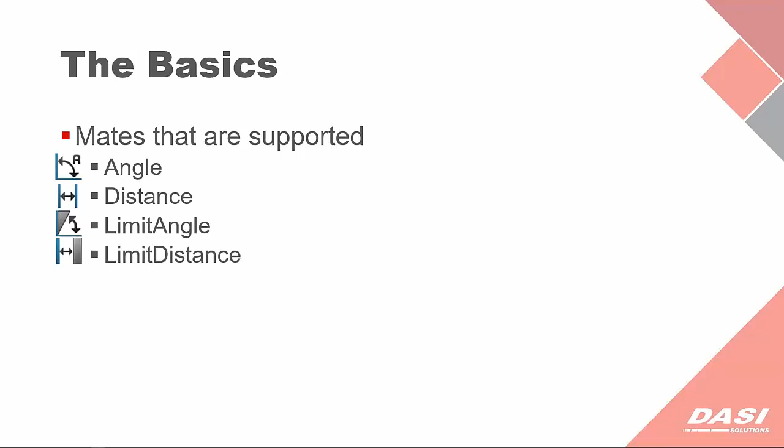So let's take a look at the basics. The basics are what mates are supported. Well, the angle mate, the distance mate, the limit angle mate, and the limit distance mate, of course, are controllable. A path mate, and path mates can be set up to be free-floating, but to use them with the Mate Controller, you have to use either the distance along a path option or the percent along the path option.

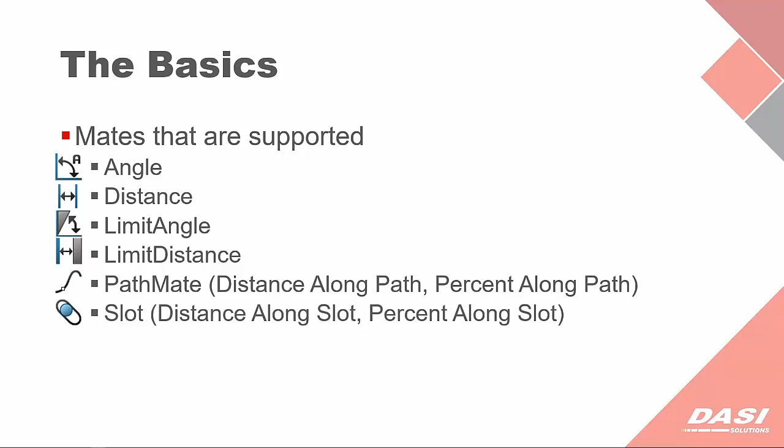Same thing with the slot mate. You have to use either the distance or the percent along the slot. And then the width mate is the last mate that can be used with the Mate Controller. And you can control either the dimension or percent on the width option.

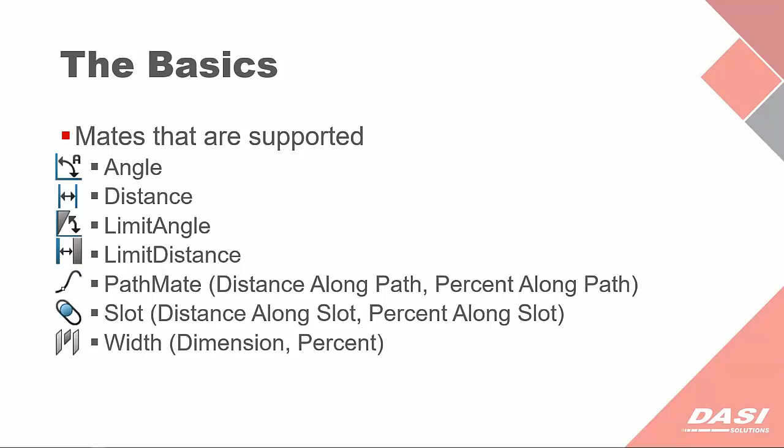So let's take a look at a simple example just to start out with. We got this plunger hook, and the way this operates is as the plunger raises and lowers along the cylinder, the clamp arms open and close. And what we want to do is create a mate that we can control with the Mate Controller.

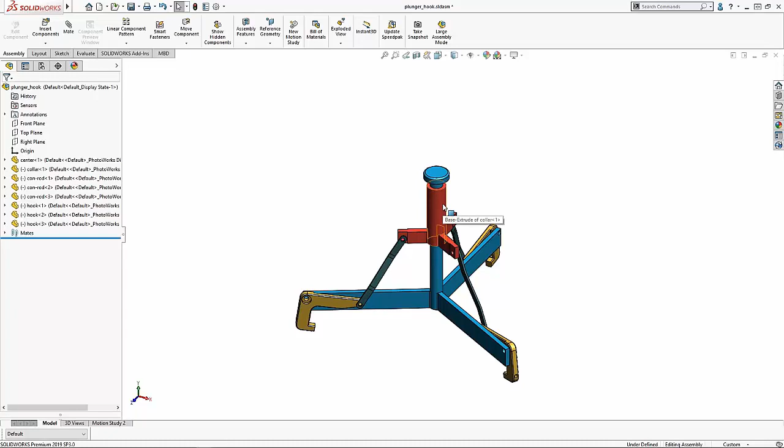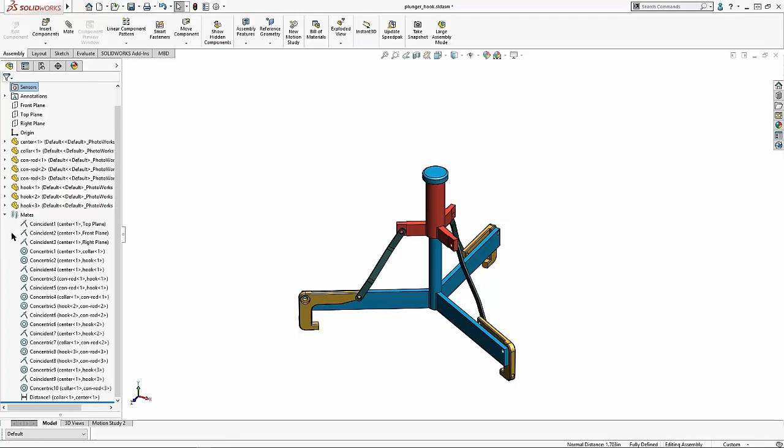So I'm going to set up and grab the top surface of the plunger and the bottom surface of the pin, and we'll create a distance mate there. I'm going to set the initial mate to 0. We'll right mouse click and use a mouse gesture to go back to our trimetric view. And notice over here in the mate tree, we've got a variety of mates for the assembly.

The Mate Controller is located under the Insert menu, Mate Controller. Mate Controller brings up a dialog box that prompts you for a couple of different things. First, we need to put the mates that we want to control. You can do that by going to the feature tree and selecting the mate that you want to control.

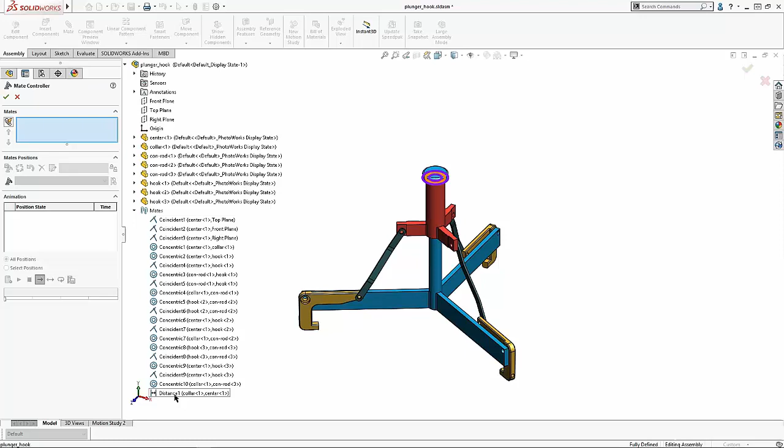Now notice if I try to select other mates here, it's not adding those. Those mates aren't valid for the Mate Controller. In this case, the only one valid is the distance mate. When I click on that, it adds it to the tree.

Let me go back and launch that mate controller again. I can collect all valid mates from an assembly by using this tool here, collect all supported mates. When I collect that, it's going to go ahead and grab that mate that's from the tree.

So now I want to go ahead and set up some positions for moving this model around. The way this works is you set up a series of positions basically. So the first position is with the distance set to 0. I'm going to create a new position, so I'm going to click Add Position. It brings up a dialog box that allows me to name the position. I can name it whatever I want at this point. I'm going to go ahead and use position 2.

In position 2, I want the red component to be located all the way down to the bottom of the assembly. So I'm going to set that distance to be 5 inches. I have to update that position by clicking the Update Position button. And now I've got that down to the bottom. And then let's do one more position before going back up to the top. We'll click position 3. In position 3, I want it back up to the top again.

So now I've got those all done. I'm going to go ahead and click Calculate Animation. And you'll see that SOLIDWORKS then goes through and runs that position. Well, it didn't go back up. What did I do? I didn't update the position. So let's go back to position 3. I want it to be 0. We'll click Update. Now let's run our animation. There we go. So that's how you set those up real quick and easy on a basic.

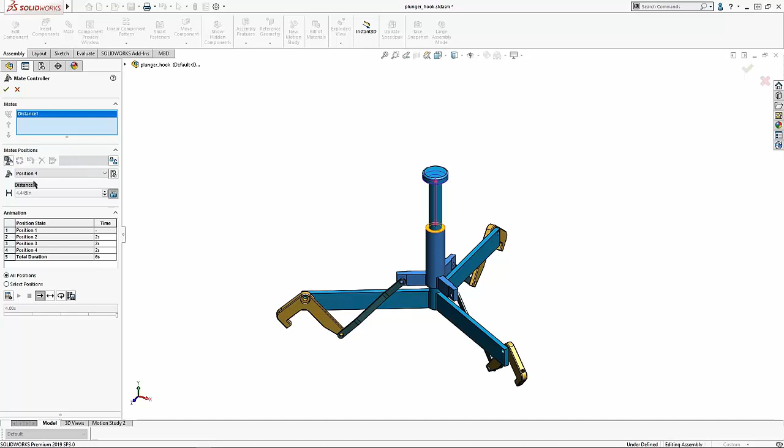When I click on that, I now can go over here and drag this to the position I want it to be located in, and in dragging that in the screen, it's automatically updating the distance over here. Notice the asterisk symbol. That's called a dirty mark. That means that this step has not been updated yet. When I click Update Position, that icon goes away. So now I've got position 4, which is an updated position backed up just a little bit.

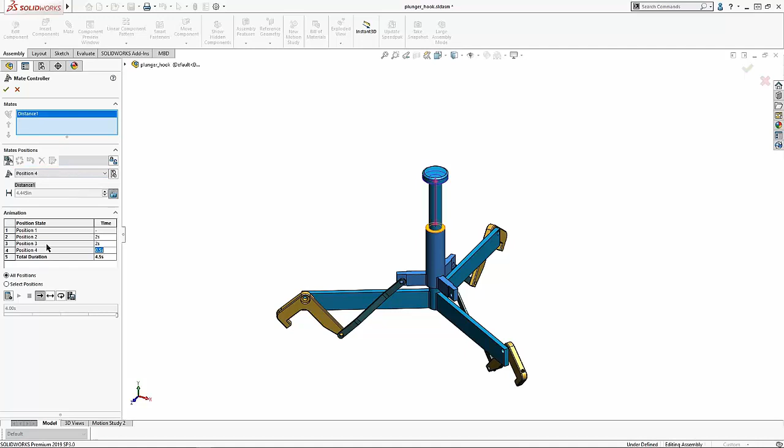I want it to go back down to the bottom position just as a jog. You know what, let's set this position to be 1/2 second. And so let's add one more position, which is going to be the bottom position. Well, position 3 is our bottom position, right? So we'll go back to position 3. Oh, position 3 is the top. Position 2 is the bottom. So I'm going to put it in position 2, and I'm going to create a new position. It's going to be based off of position 2, and we'll click OK.

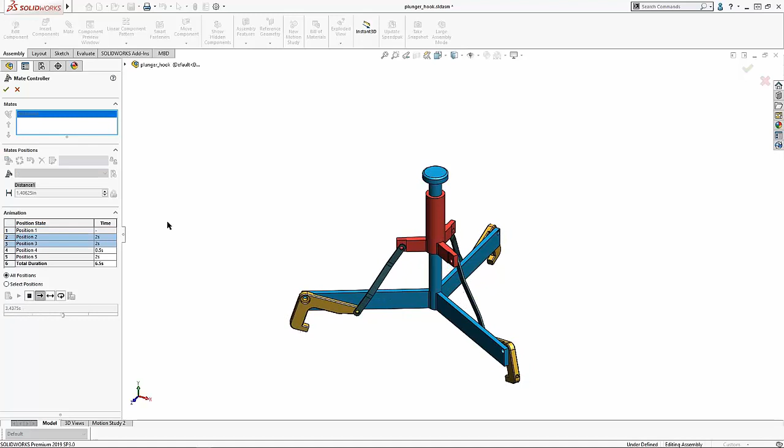So let's run this animation, and let's see what we've got. So we're coming down to the bottom. It's going back up to the top. Oh, it's jumping down to the 1/2 position. Well, that's not quite what I want to do. I basically want it to do 4 and 5 before I get to position 3.

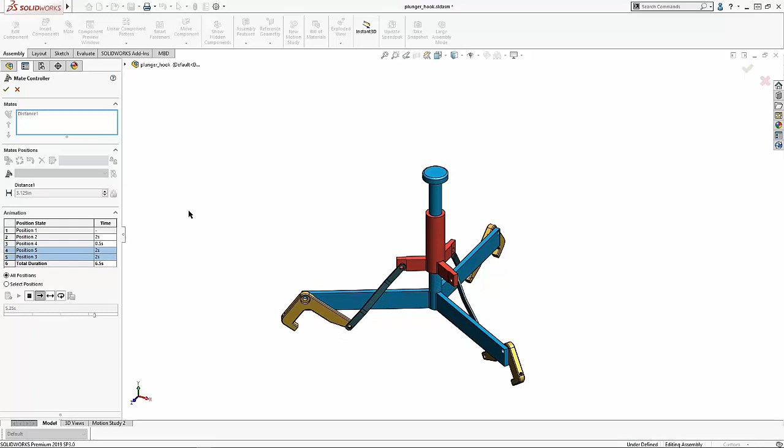So let's go back up here and go to position 1. But I want 4 and 5 to be above 3. So let's move 3 down to the bottom. Click OK. And now let's run our animation again. It's coming down to the bottom, jogs up, does a little bit of release, and then back up to the top. So that's how you edit your positions.

Again, you can rename those if you wanted to. Once I've got that done, I can save this out as an AVI as well. So down here at the bottom is to save this out as an AVI.

There's also a slider at the bottom that allows me to move this through the positions, so I can move it through the positions manually after I've got them calculated.

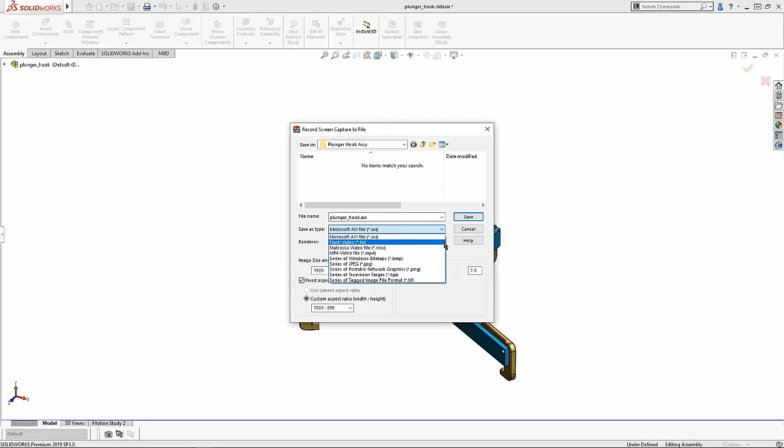To save that AVI out, you click on Save. You have the option to save it as an AVI, or you can save it as an MP4. You've got a variety of options to go through there. I'm going to save that for another animation, but that's how you get to it.

Once you've got your Mate controller set up, you go ahead and click OK. That adds it to the feature tree at the bottom, and you're ready to use that for your models down the road. I'll show some other capabilities of that on the next model.

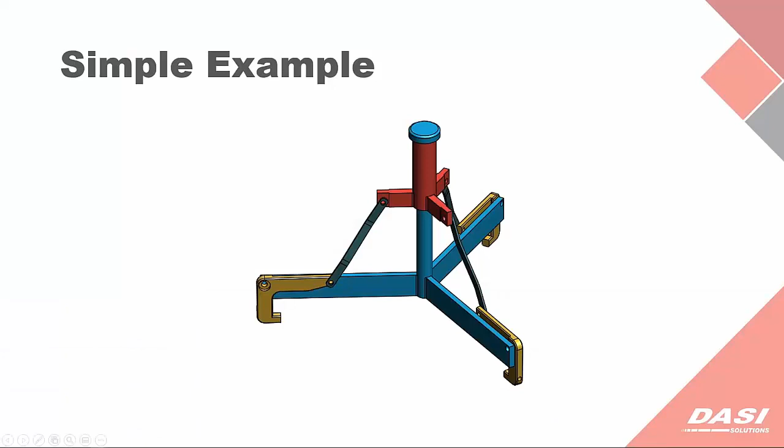Okay, so that's our simple example. So how about a puzzle? Let's take a look at a puzzle. I created this puzzle box just to demonstrate a couple of things I thought would be interesting. I've already got a Mate controller set up in this one. I'm going to bring it up real quick and run through an animation.

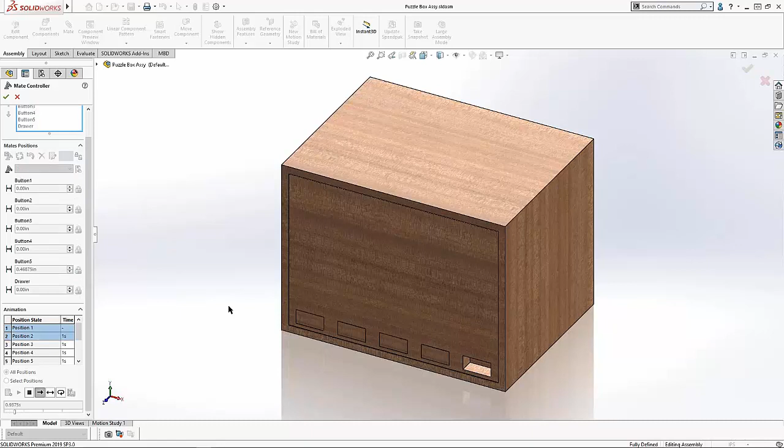So you want to make this puzzle box. I want to be able to open this puzzle box by pressing a series of these buttons at the bottom. The way I've got this set up is you press the last button in, then the next button in, then this one, then the middle one, then the last one, and you can slide the box open.

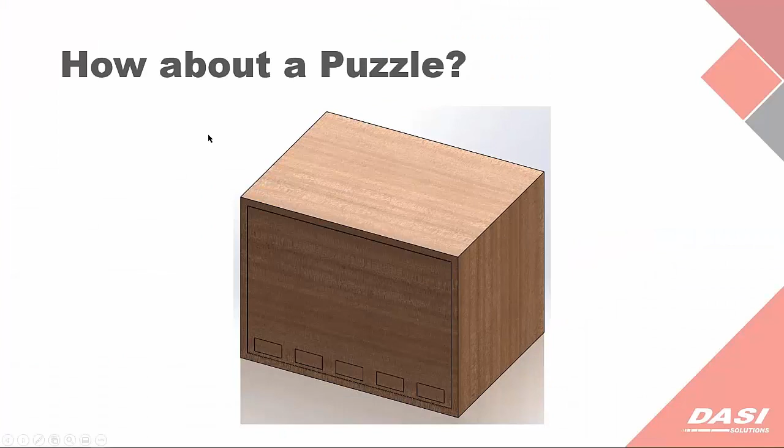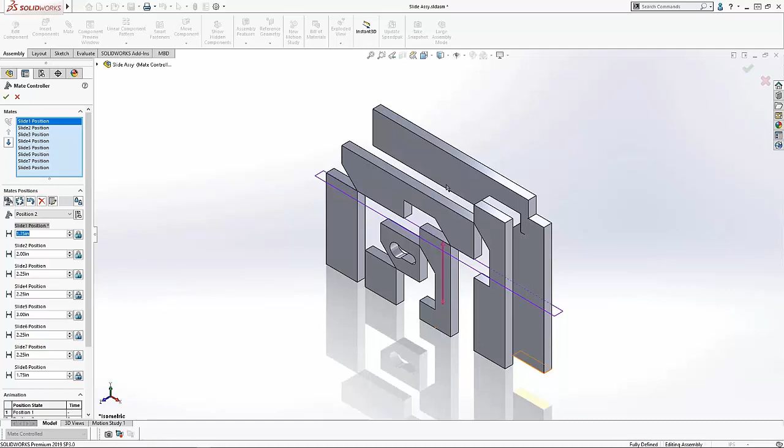Position 2 is going to be the next position. I'll go ahead and create position 2. In position 2, I want this slider over here, and you can see when I click on the dialog box, it highlights the elements that I've got here. I want this to be raised up half an inch, so I'll say minus 0.5, and that slider goes up. When I do that, I'd expect this slider to slide to the left, which is the next slider up here, and that one's going to increase by half an inch, so I'll do plus 0.5. I'll go ahead and save that position.

All right, let's do the next position, position 3. I want this slider to be able to push up into that opening, so I'll do minus 0.5 for that position as well, then update that position, and keep going through the steps.

We'll do another position, position 4. In that position, I want this slider to go up and push this one over, so minus 0.5 for that position, and this position is also going to be minus 0.5. We'll update that position.

Position 5 is going to have the next slider push that button - it's going to slide that one up. So I'll go up half an inch on that one, and update that position.

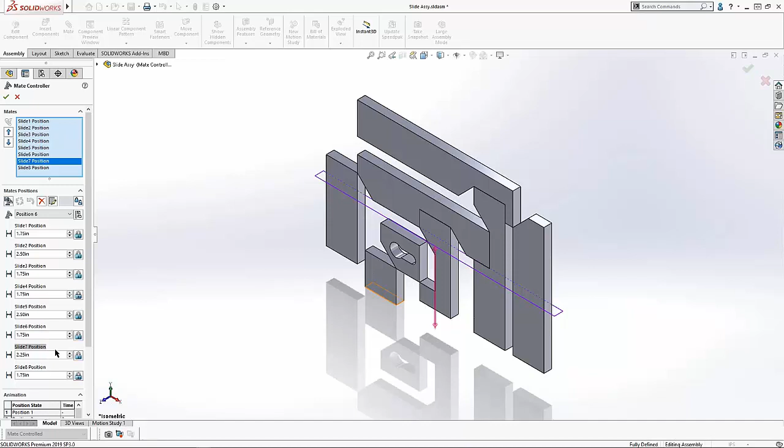Next, position 6 is to push this button up, so half an inch up on that one, and half an inch in on this one.

We'll update that position. Let's see what that looks like now. So we'll go ahead and generate the animation. There we got that slider going up, that slider sliding in, that opens up the next slider, and then this next slider goes up. Perfect.

So the last position is when I reset all the buttons. I've got it set up to where when this slider slides back over, all the sliders should reset. I'm going to go back to position 1, which is my start position. I'm going to add a position for that one, which is position 7.

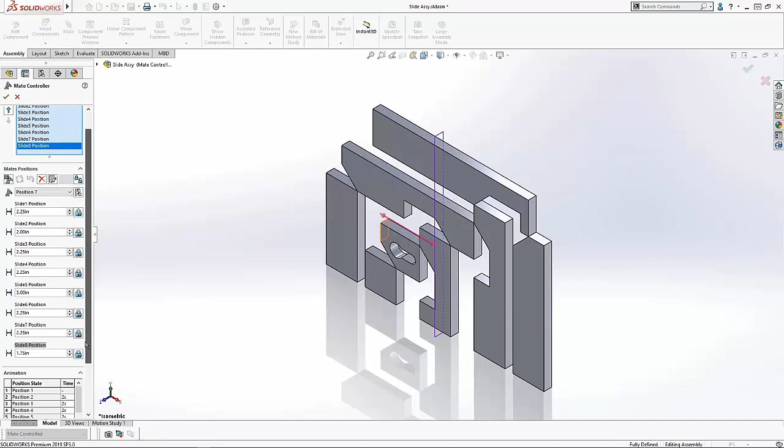Now when I run through the animation, it's going to push each slider up into position. Of course, the last slider's got this unlock feature that's going to release the drawer to be able to slide open. And then by pushing on that top slider, it's going to reset everything back to lock position.

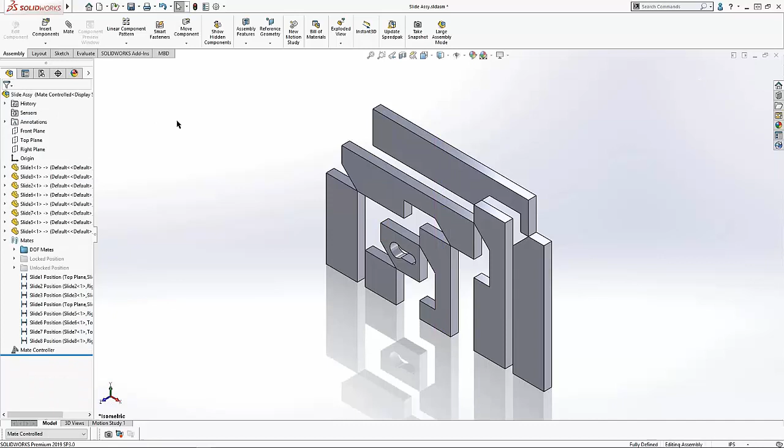Pretty cool. So that's the mate controller. That's setting that up for that puzzle box. I hope that was helpful for everybody. So we'll close that one out.

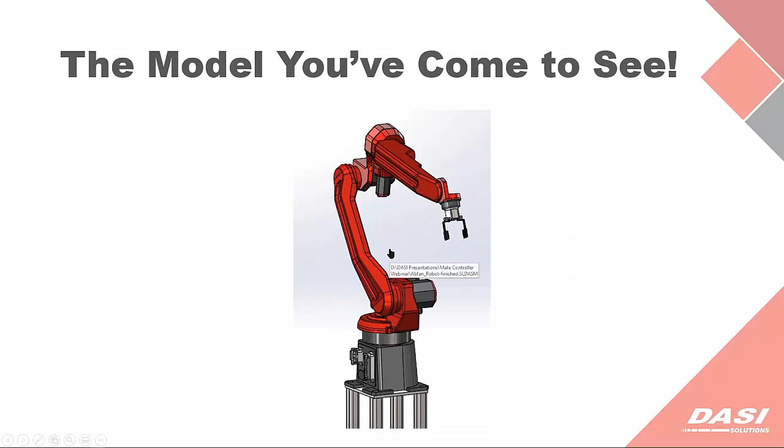And then the model you've all come to see is the robotic arm. So let's take a look at the robotic arm model and what mate controllers do for us in this model.

So the mate controller - you've got a model like this that's got a lot of degrees of freedom. If I move this model around, you can see we've got motion around the axis on the base, we've got motion on the arm up here. When you've got a model like this with a lot of degrees of freedom, it can be challenging to get it in the right position and put it exactly where you want it.

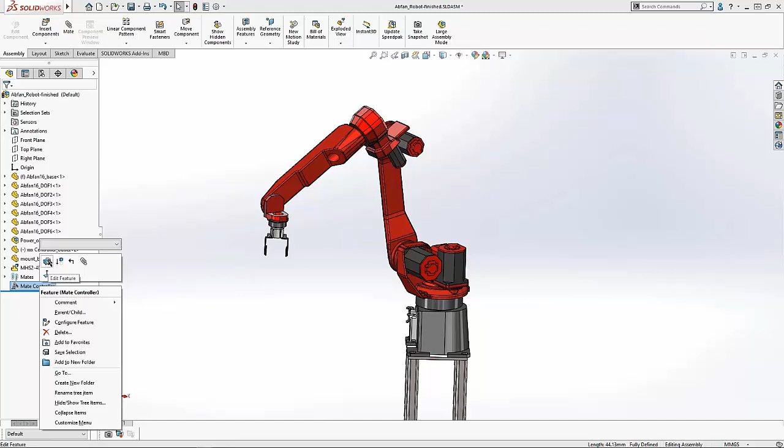Using the mate controller, you can set up those angles to be where you want them to be. So let's bring up the mate controller. I'm going to right-click, edit the feature. We'll go ahead and put it back in the home position, and let's bring up our start position for our saved position to start with.

You can see each of the mates that have been set up here - we've named the mates so that it's easy to go through them. We've got the base twist, the upper arm angle, elbow, and so on. Each of these positions has been set up with the corresponding mates. You can see the mates listed along the side over here.

Let's go to position. We've got pickup position, and we've got a closed jaw position. So each of these mates is controlled through the mate controller. You can use the sliders to adjust the mates to the positions you want and set those up. Once they're all set up, you can go through the animation.

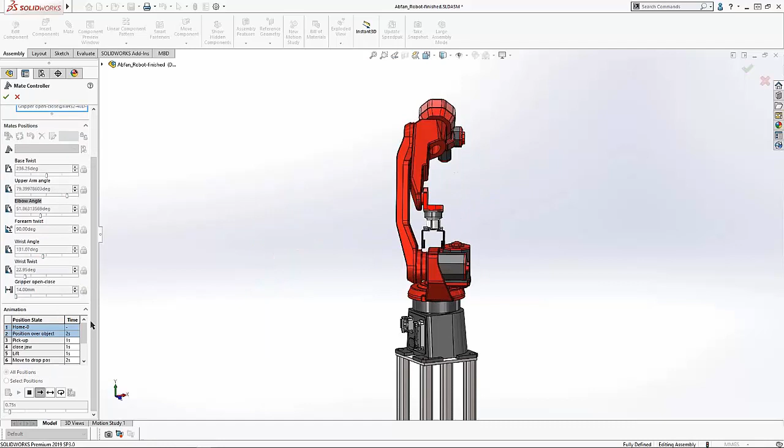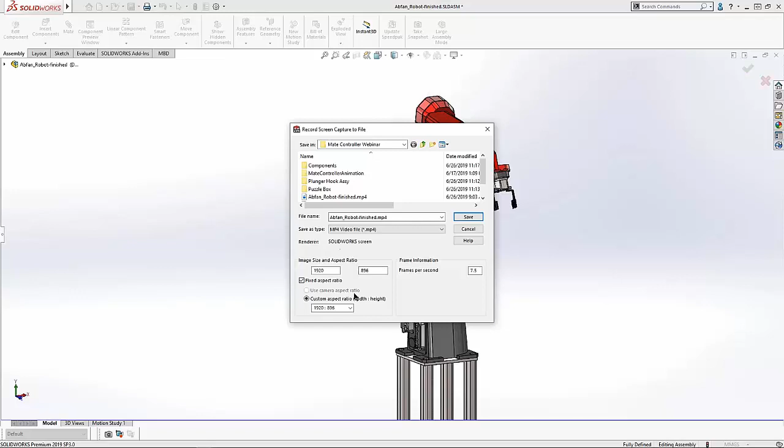And of course, you can save that out as an AVI. So I'll go ahead and show how that works this time. I'm going to click Save as an AVI or MP4. I like to use the MP4 option. You can set your aspect ratio for all those. Go ahead and click Save.

It's going to go through those steps and create that video file output, just like that. So let's take a look at that video file output. Let's go ahead and save that for a second. We'll go down here and open the folder for that, and let's take a look at what that MP4 created.

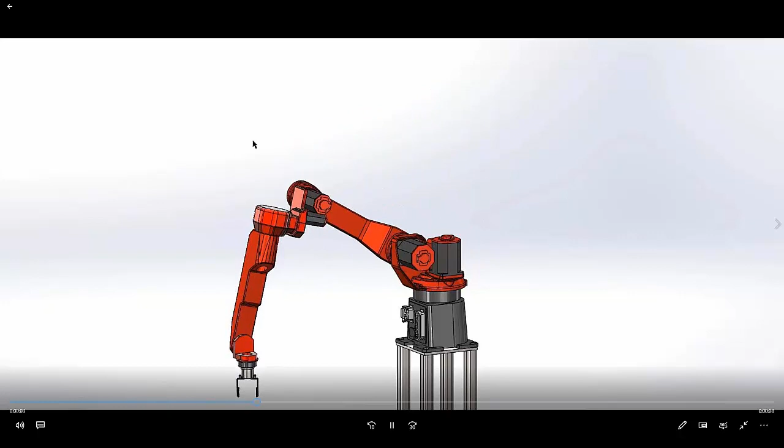So there's the output. This is something you can send to your customers. You can put it on, you can share it however you need on social media. So that's saving out the AVI file.

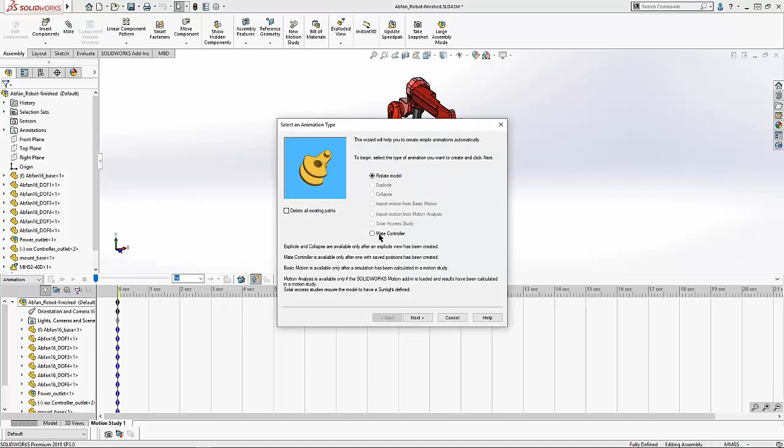You can also bring this up in a motion study and use the mate controller animation in a motion study. When you bring up a motion study and click on the animation wizard, you'll see down at the bottom, if you've got a mate controller in the assembly, you'll see mate controller listed. When you click on that, click Next.

You can use this to generate key points or do this for motion analysis. I'll use the key points. We'll click Next and Finish. That generates the same type of thing for the motion study. We can click Calculate, and we can see how that goes through and gets the same results.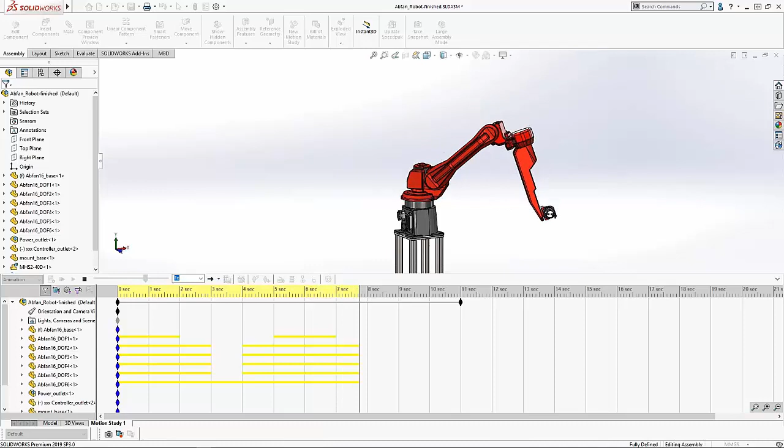So you can use this - once you've got your mate controller, you can use this in other studies to study the motion of the assembly.

So that is the mate controller. It's fairly simple to use, fairly straightforward. You set up your steps, you set up your mates, and run it through the motions.

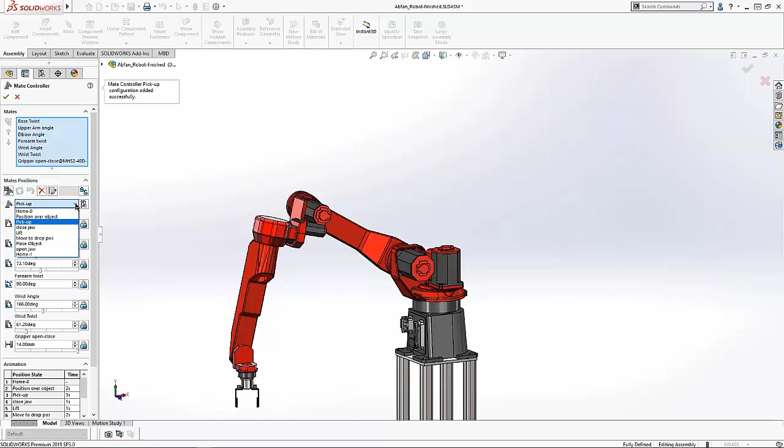One other thing I forgot to mention, if everybody's still watching, is you can set up different configurations for each position. So say, for example, home 0, I can click on this Add Configuration button, and it adds that to the Configuration tab. Maybe I want to make a drawing of this in each position. So I can put it in the home position, the pickup position, and add a configuration. Let's go down to Place Object and add a configuration for that.

When I do that and go to the Configuration tab, I now have configurations for each of those positions that I can use in, say, a drawing, for example. So I meant to mention that.

In an assembly where you have multiple sub-assemblies, can Mate Controller be used? Oh yes, definitely. The Mate Controller can be used. Basically, if you've got multiple sub-assemblies, you're using a Mate Controller for each one. So yeah, you can definitely do that.

I think you'd probably set them up as if you had a fixture and another part coming into that fixture - you would overlap them by setting the mates to run at the same time. I think that's how you would set that up. I hope that answers the question.

The next question from Jim: so this is more or less an animation key controller using mates. I was thinking this was how to group, bias, or otherwise add weight to an awkward bunch of complex mates to make it more draggable. No, it's basically setting up - you're controlling the mates, doing a group of mates to control them, and basically setting up steps for it. So that's really all it's for.